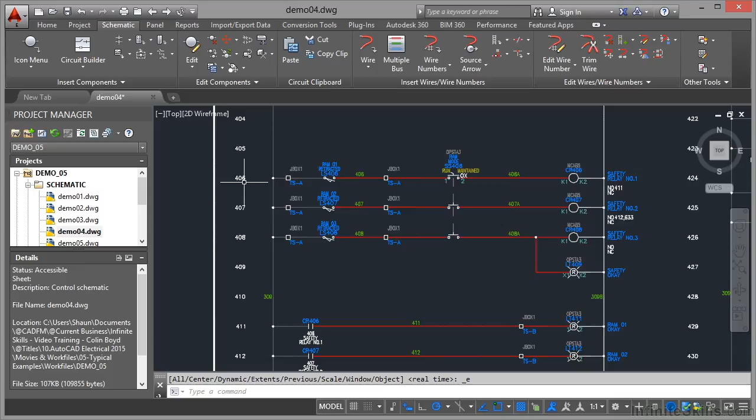And what you do there is you join from one side of the ladder to the other. So if I zoom in nice and tight now, and just pan a little bit here. Let's just get this so that we can see what's going on. There we are. So we can see the ladder. Now something you'll notice are these numbers here. 406, 407, 408. They are the ladder rung numbers.

And you use this command here. If I click on the flyout there, I've got insert ladder. And what you do is you set up a special grid setup for ladders. You'll notice you've got XY grid setup and X zone setup. We'll cover those later, but those particular setups are important when you're setting up ladders in AutoCAD Electrical.

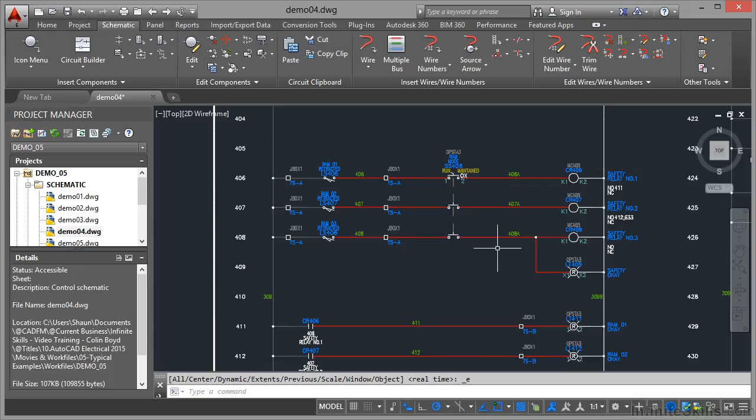So your ladder drawing, you're going from one side here, going all the way across to the other side. So you can see there, look, that's linking to safety relay number 1, safety relay number 2, and so on. If I zoom in a bit more though, you can see that the setup is very similar to a point-to-point schematic. So this is a logic ladder schematic, and you've got a point-to-point schematic. But all you're doing is laying out the circuitry in a different way.

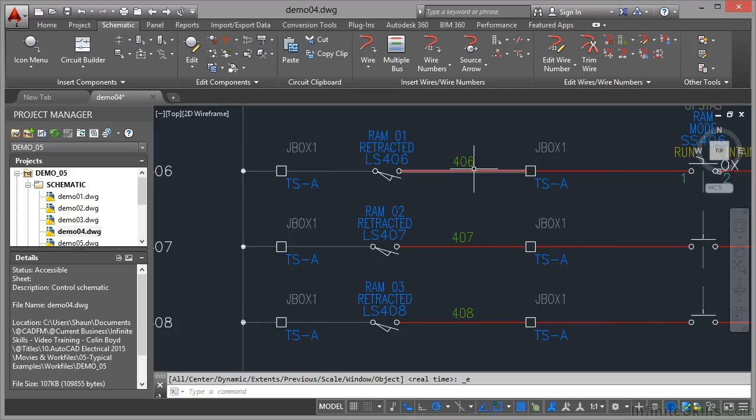So you can see you've got things like switches, junction boxes, you've still got your wire numbers, you've still got your tags here. So I can select junction box 1, right-click there, I can edit the component if I want to. If I edit the component using that right-click menu, there's the symbol name, it's a terminal, I can add, modify the properties and associations on the terminal, I can change the tag strip, the location, and so on. I'm not going to, but I can go in and edit that information at any time.

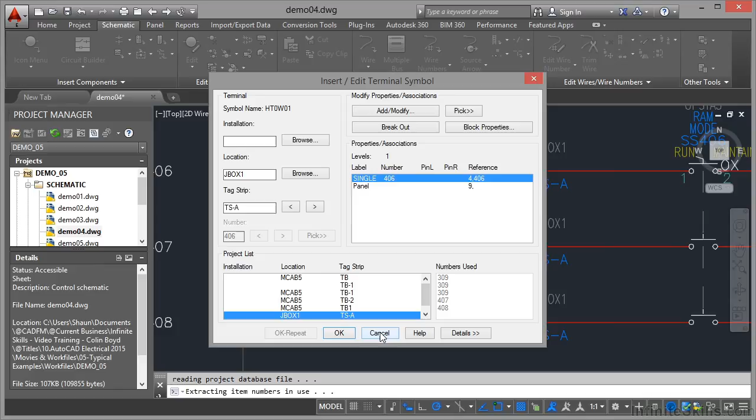You must use the editing tools in AutoCAD Electrical though. This is all linked to the AutoCAD Electrical database and you must use the tools provided. Don't just go in and use the AutoCAD text editing tools to change a wire number or a junction box number. And don't explode the blocks either, because they are all linked, automated with parametric tools and block attributes and so on. The whole idea of this is to make your life easier. You will make your life much more difficult if you explode things in a typical AutoCAD Electrical drawing.

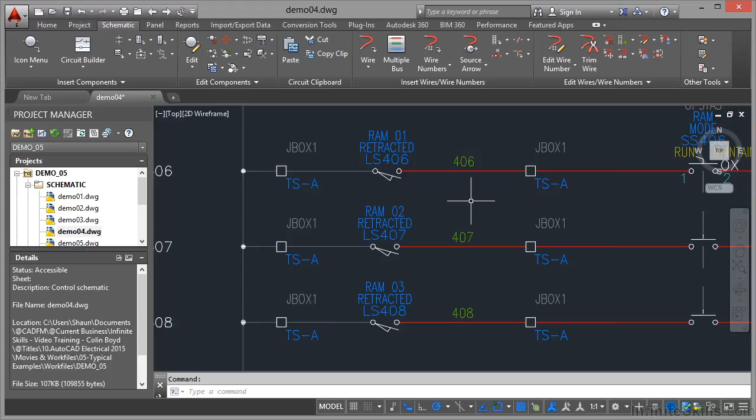So I'll just double click there on the wheel now to zoom extents and again show you the entire drawing. So there's one logic ladder there and there's one logic ladder there. And you'll notice from the numbering, if I look at the bottom rung, that's at 418 and goes to 420. If I zoom out now, pan and zoom in here, there you go, there's 420 there, and it tells you that it starts at 418.

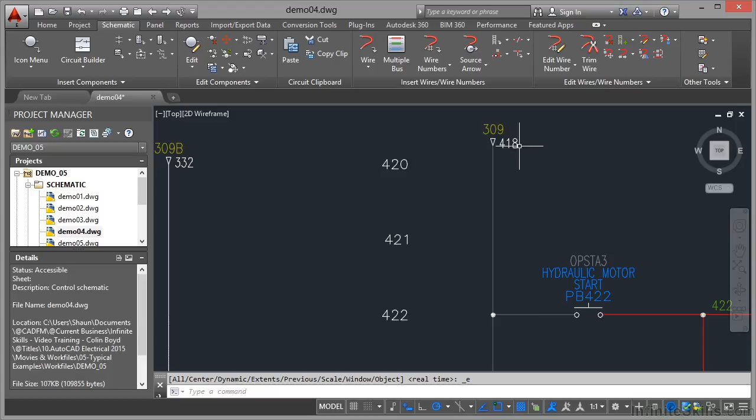So what you can do is you can split the ladders as well and number them accordingly. So I put one ladder in there and tell it to number from 401 right there, and then this one I'll tell it to start at 419. So it allows you to work with these tools such as logic ladders by placing the components going across from one side of the ladder to the other as rungs. And the good thing is each rung is numbered.

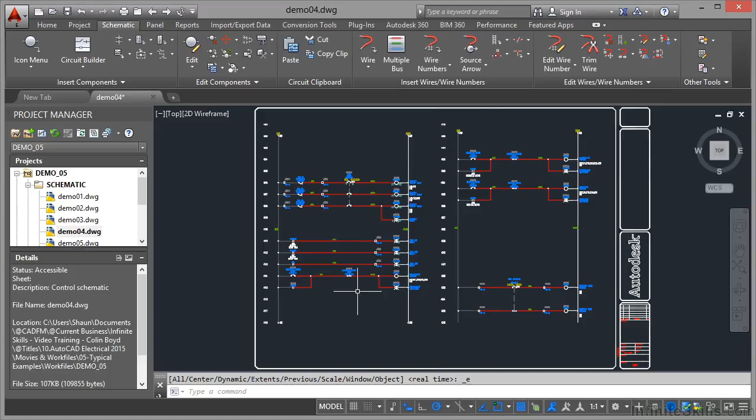You have a reference. Point to point, you're literally drawing the circuit as you go from one point to the next point, using what they call connectors to link into the main wiring. So that's another typical AutoCAD Electrical drawing, this time a logic ladder drawing.